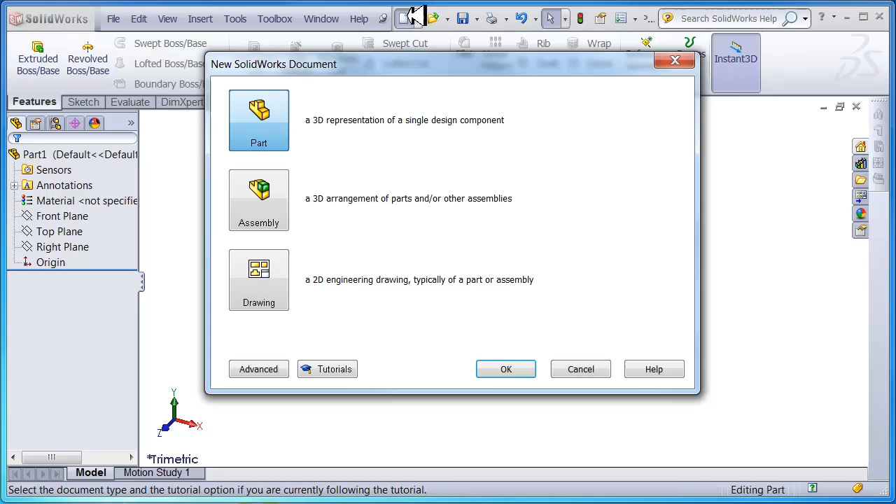I've started a new part file. If I need to do that again, I go up to the new button and double click on part, and it starts a new part file. I always like to set mine to plain white, but you don't need to do that. What I'd like you to do is come up to the options bar, find document properties, then grid and snap, and we're going to display the grid. That's the first thing I want you to do every time we start a brand new drawing.

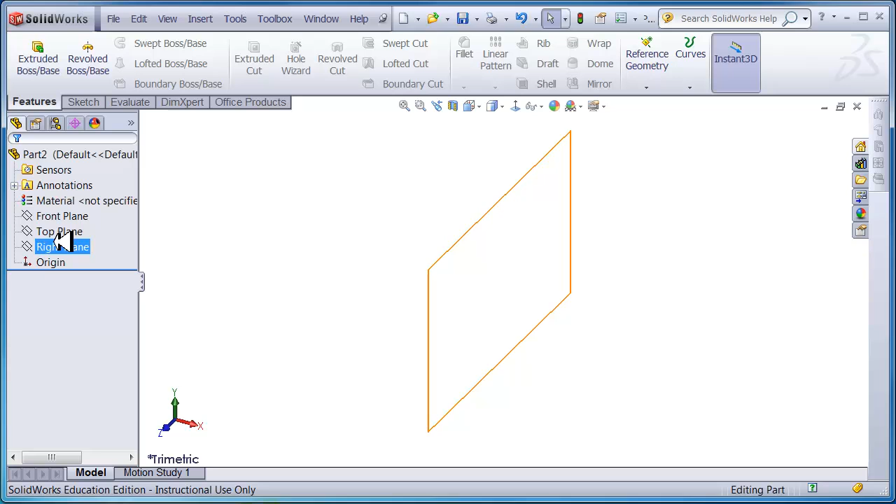As we look around the screen, we have toolbars up here. We're going to use the sketch toolbar and the features toolbar for everything we do. Sketching is our 2D drawing tools, and the feature toolbar is where we make it 3D and work on the 3D portion. Down on the left is my design tree. As I click on the planes, you can see the different planes highlighted, and we're going to start on the front plane.

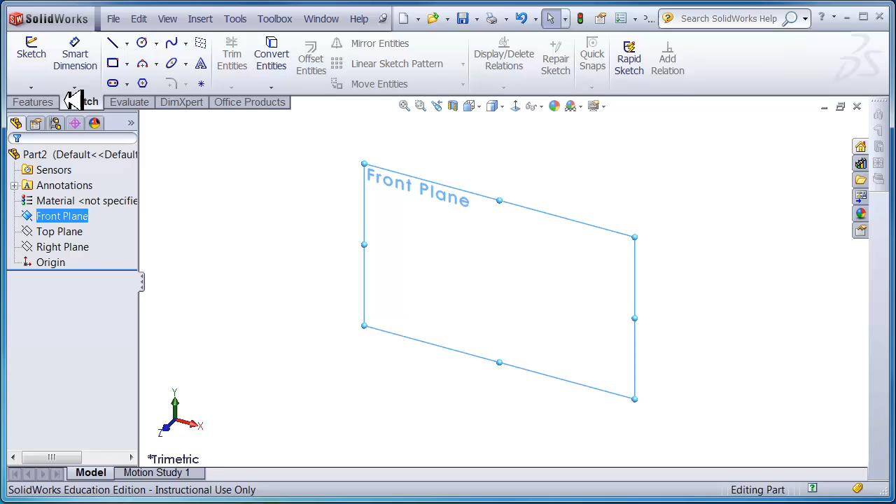We want to activate a sketch. I have the front plane selected, I click on the sketch toolbar, and then I activate the sketch. You'll notice I know I'm in an active sketch because the grid lines are there.

The first thing I'm going to do is draw the bushing, but before we start, let's look at the bushing and understand some dimensions. This cylinder is a diameter of 1, and the length of that cylinder is 0.5. The outside cylinder, the big one, is a diameter of 1.375, and the total bushing length is 0.75. So we know this distance is 0.25. It also has a hole in it so the axle can go inside, and the hole is diameter 0.75. So as I start putting dimensions in, you'll understand where I'm getting those from.

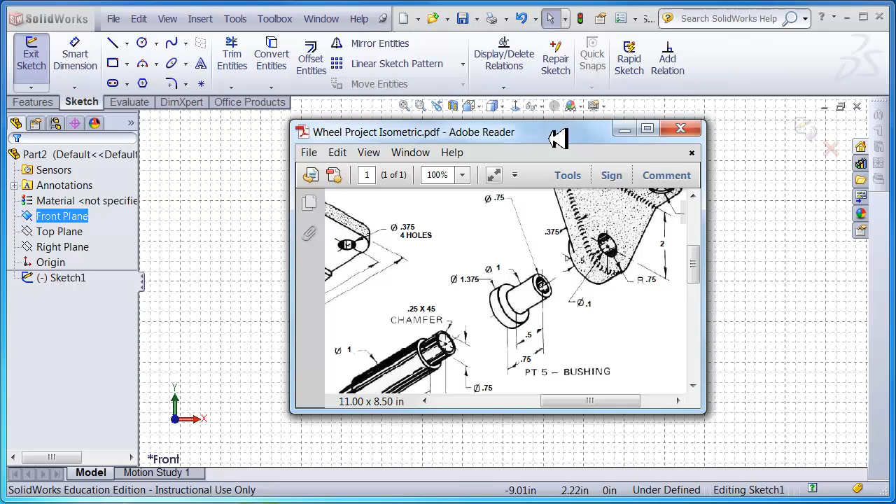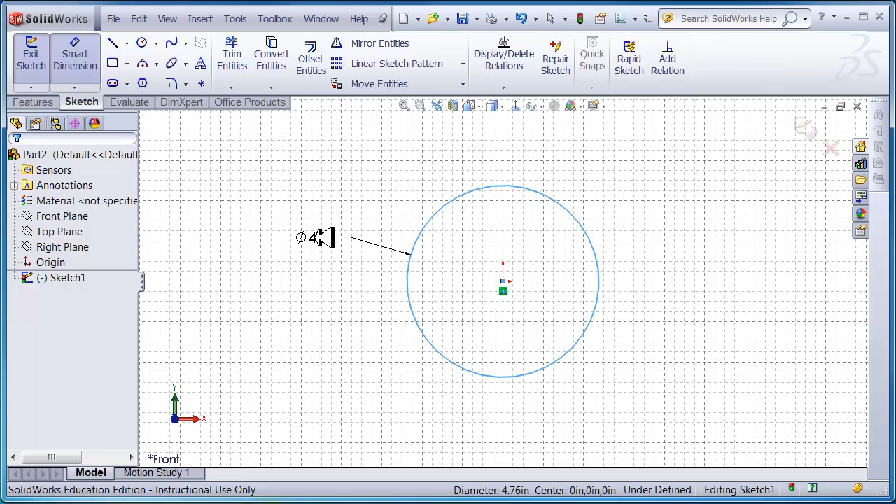I'm going to start with a circle, starting with the big one first, and it doesn't matter the size I put the circle in. Please do not try to guess where that goes. I'll just click it in place, then come over to the Smart Dimension tool, and we're going to dimension it to 1.375. There it is. In SOLIDWORKS, I do one thing at a time.

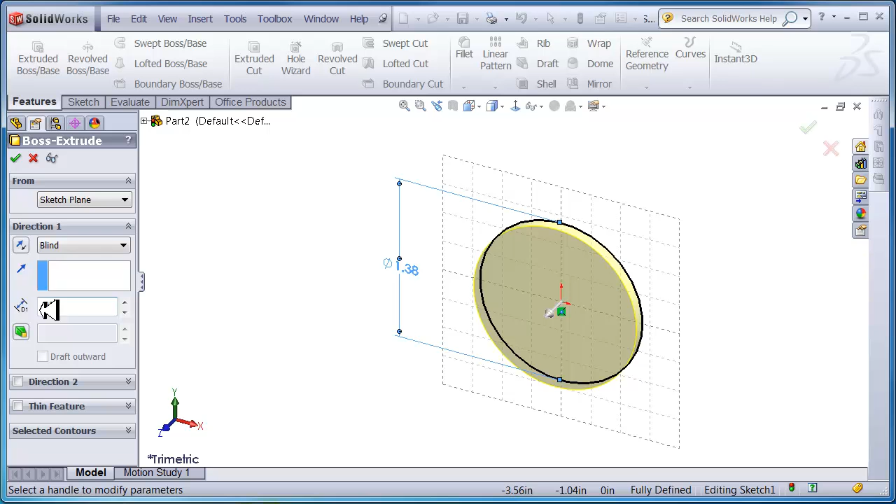So I have my circle, then I'm going to extrude that circle. Remember we said it was 0.25, so I type that in the depth and hit the check mark. Now I have the first portion of my circle.

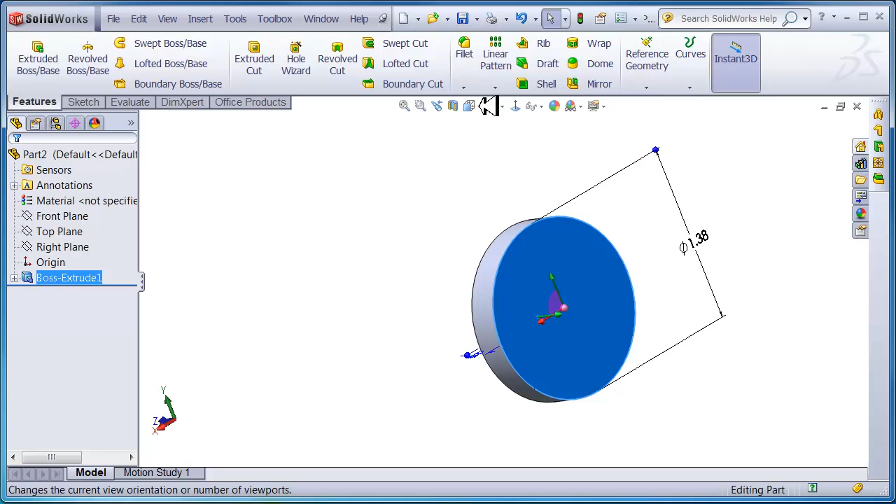Now I need to put the other cylinder on, so I click on a surface and turn it normal to. If you don't have the toolbar right here, it's hiding under this one. Normal to, sketch - my grid is active so I know I'm in a sketch. I find the circle command, and I like to tie everything to this center point. If I just hover the mouse on the edge, it'll bring up the center for me.

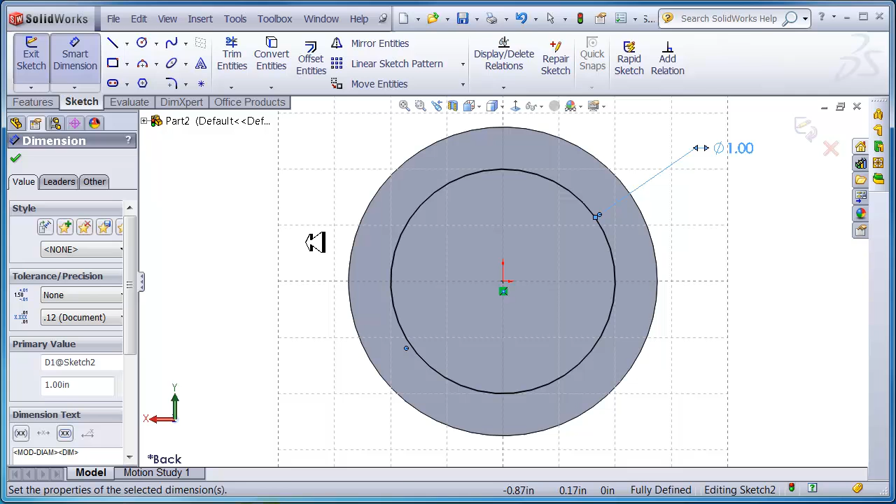I put my circle in, use Smart Dimension to dimension that one to 1 inch, and then I'm going to extrude that - 0.5, I believe, is the right number. Check mark, and I'm almost done.

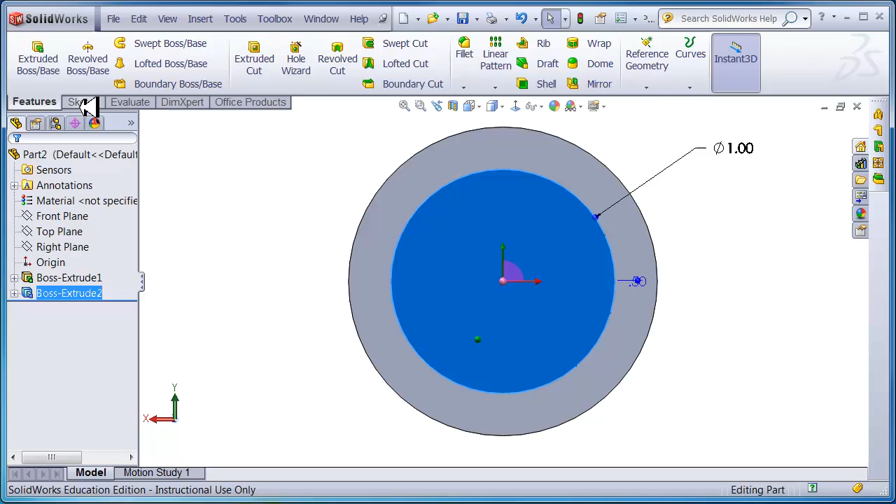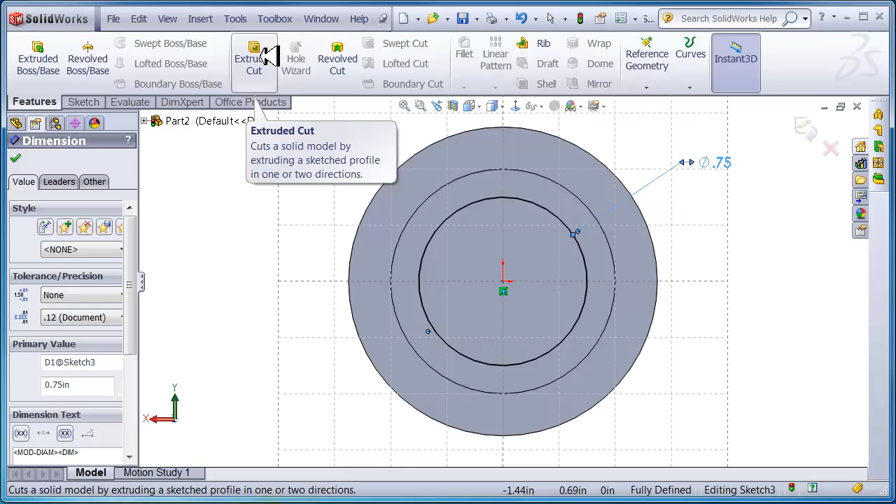I have one last operation to do, and that's to put the hole in it. So again, I click on the surface, turn it normal to, go to the sketch toolbar, activate a sketch, and draw a circle from the center. Smart Dimension that circle to 0.75. Then I go to features, and instead of extruding this time, I go to extruded cut.

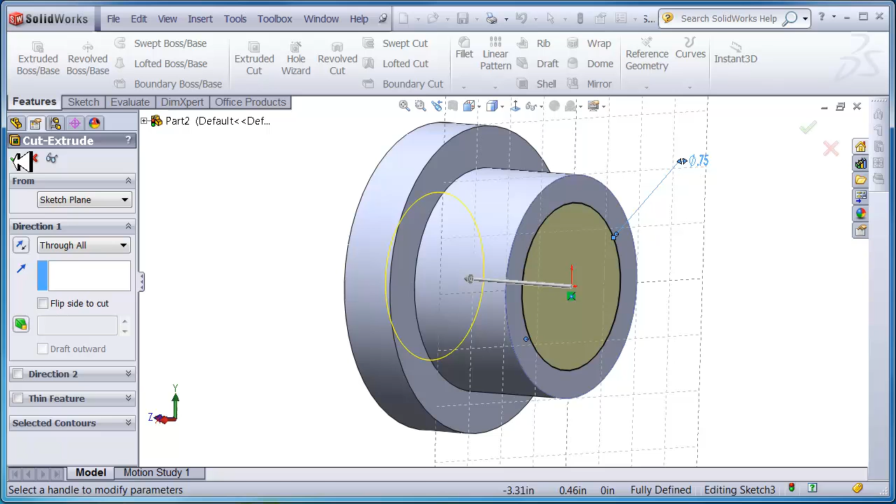I click on that, and it's going to cut a hole, but it wants to know the depth. I could put 0.75 since that's all the way through, or I can go to 'through all,' which takes my hole through the entire object. Click OK, and it's now done.

Let's go ahead and color this part. If I click on the part, I go over to appearance, and let's make that a nice orange color. Click OK, and then we can go and save this as our bushing.